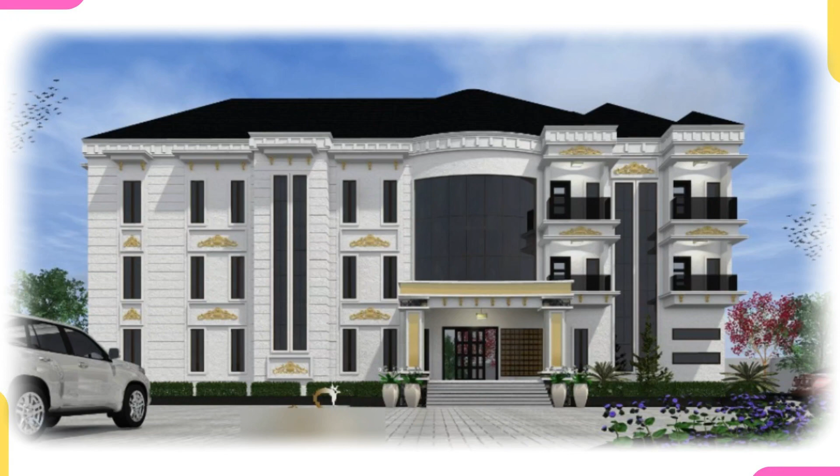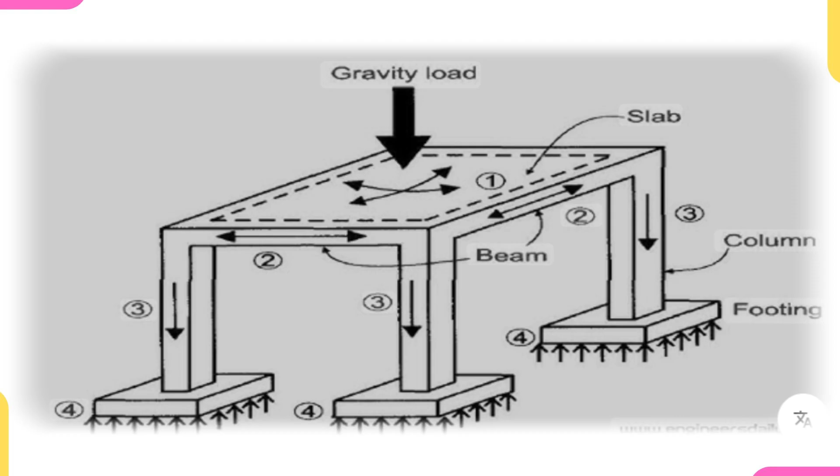Every building you see, no matter how beautiful or well designed, moves. Concrete expands when hot, contracts when cold, and shifts under load. And if we don't give that movement a place to go, the building will create it by force through cracks, separation, and structural failure. That's where expansion joints come in.

In this video, I'll be explaining everything you need to know about expansion joints, what they are, why they are used, and the engineering principle behind where we place them. We will talk about temperature changes, long span structures, shrinkage, differential settlement, and how expansion joints protect your building from

stress and cracking. By the end of this video, you will not just know what an expansion joint is, you will understand how to design it, how to position it, and how to keep your structure safe, durable, and stable for decades.

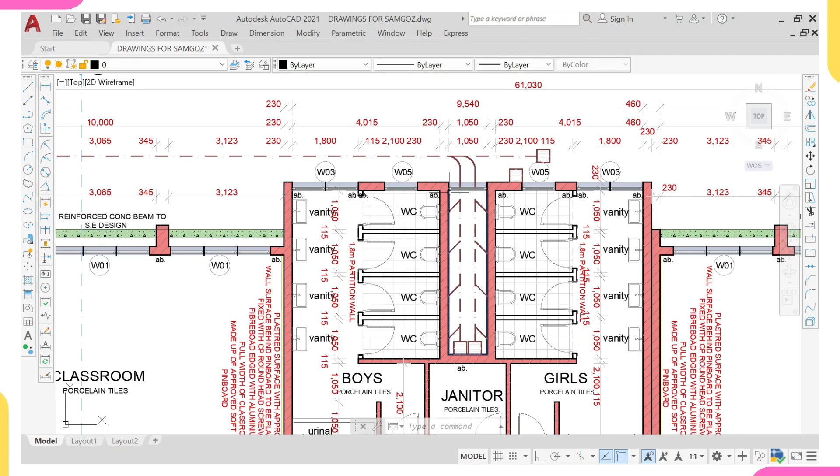This is a school building that we recently carried out for one of our clients. So if you can see, this building is more than 60 meters in length. This video is all about expansion joints. So first, I'll start with why we have expansion joints in our building. It's due to thermal expansion and thermal contraction. Let me explain so you get to understand better.

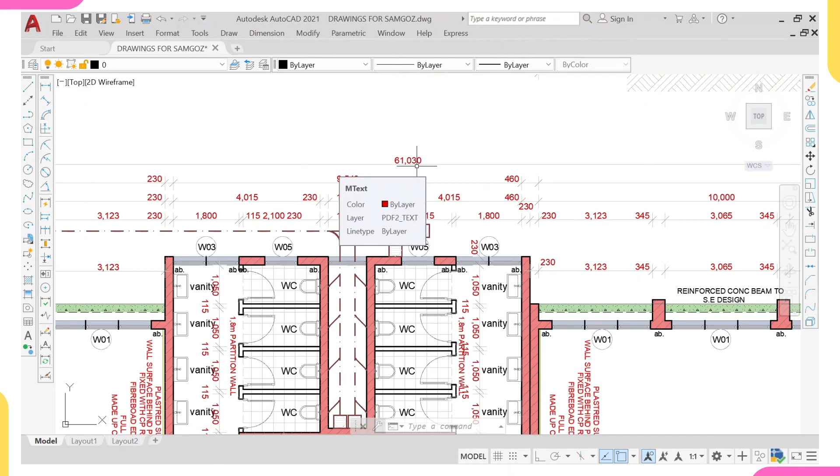Remember, concrete is subjected to expansion during high temperature. That means when it is under sun, concrete will tend to expand, and it is also subjected to contraction during low temperature. That's during cold weather, concrete will tend to contract. That's expansion and contraction, and this is known as thermal expansion and thermal contraction.

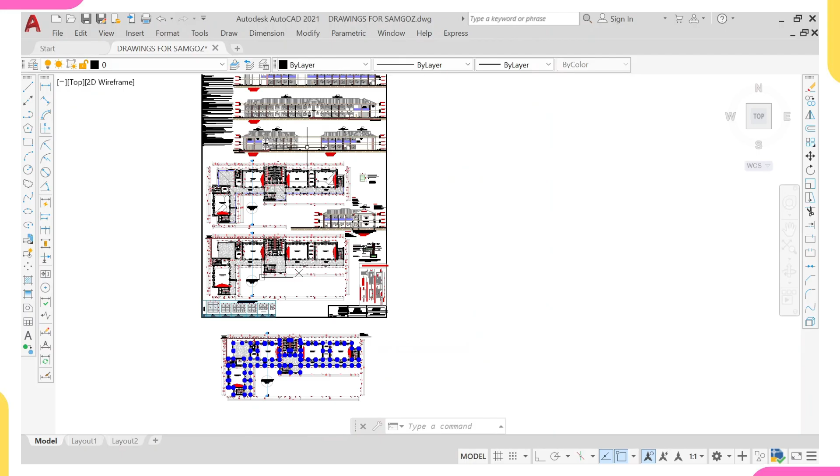So we include expansion joints so that our structural members can easily expand and contract without causing cracks. So for that reason, once our building is more than 30 meters in length, we include expansion joints. And how do we include expansion joints? So if you see, this is the school building project. This is the elevation, and this is the floor plan, the first floor plan. Then this is where we did our column placement.

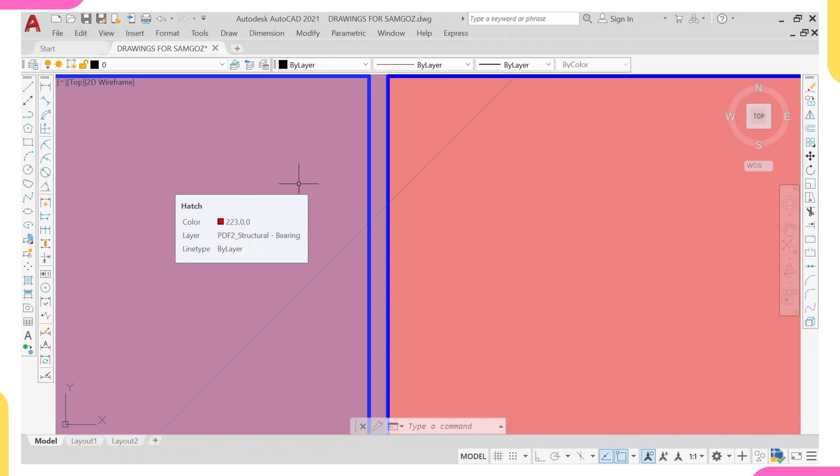So how do we introduce an expansion joint in our building? You introduce an expansion joint by placing two columns close to each other. Then the space in between those two columns is called your expansion joint. That means concrete will expand and contract, so that once it's expanding, it will not come in contact with this structural member. It gives it room to expand, and as a result, it will not cause cracks on the neighboring structural member.

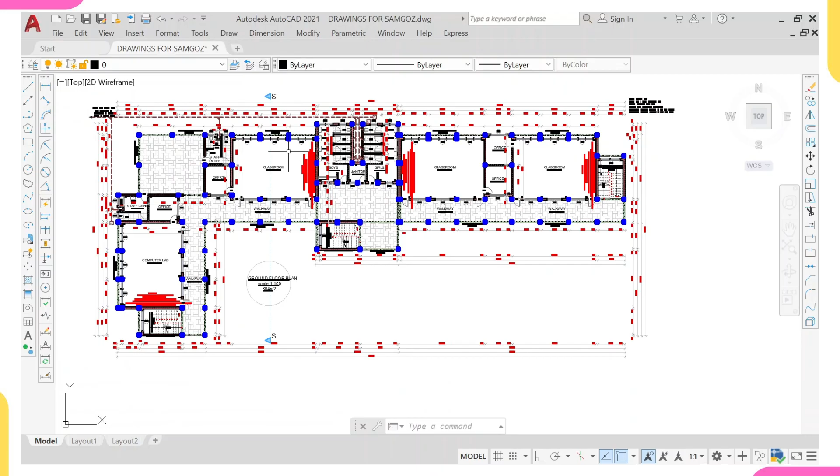So if you can see, this is the expansion joint. Look, we have this column and also this column. Then in between them is a space of 25 mm. So that space is our expansion joint. That means our concrete can expand and contract without causing cracks on the neighboring structural members. So that is the main reason for expansion joints.

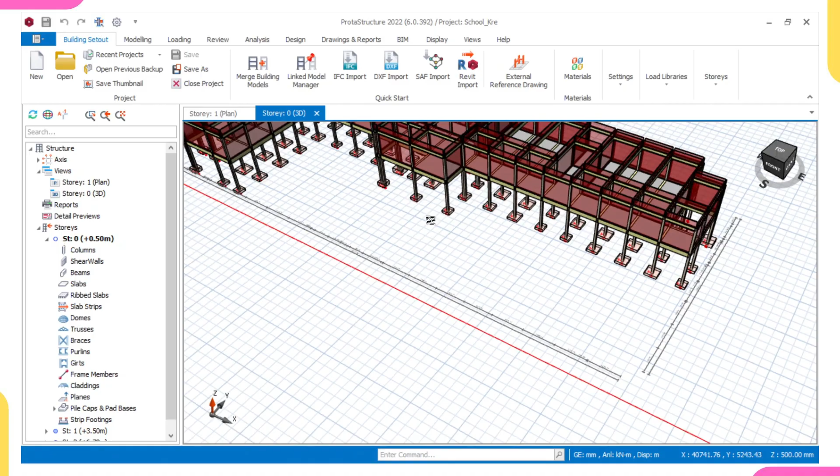Then I would like to explain something. Some people will also ask, should this expansion joint be seen at our foundation level? The answer is no. The expansion joint should not be seen at our foundation level. The reason is because at the foundation level, there is no temperature change. The temperature at the foundation level is moderate, because our substructure is covered by soil. So that soil causes our substructure to have a moderate temperature.

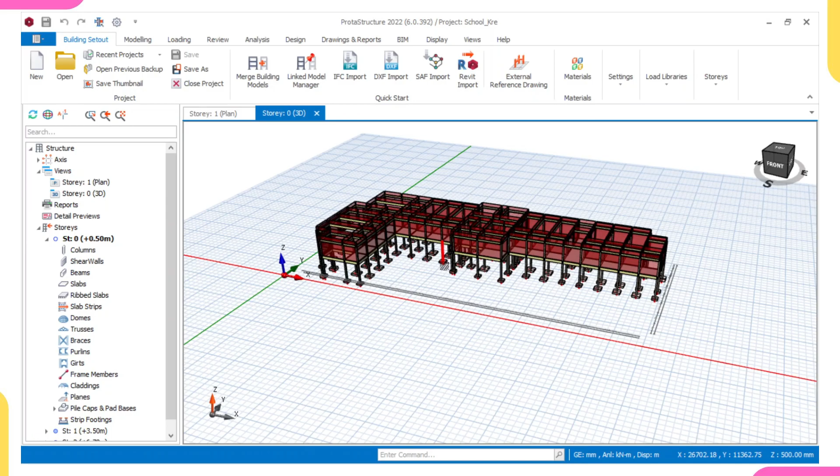That means at that substructure, there will be no heat and no cold, meaning that there will be no expansion and contraction, because the soil serves as an insulator. An insulator is any material that does not conduct heat or does not permit heat transfer. So since the soil acts as an insulator, preventing heat transfer in our substructure, there will be no expansion joint at the foundation level. That's why if you look at this pad footing, the expansion joint is not included.

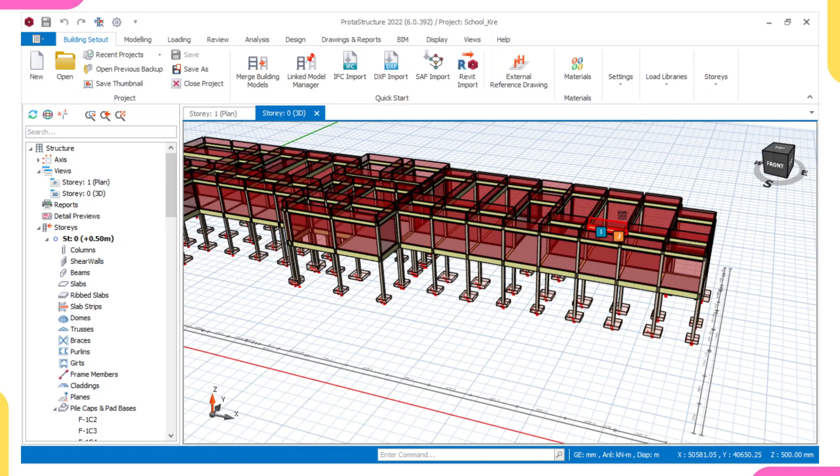But we do include settlement joint at the foundation level. Okay, what is the difference between expansion joint and settlement joint? For example, assuming that these are expansion joints, assuming that this side of the building is a three-story building, while this other side is just a one-story building, you know that the rate at which this side will settle will be different from the rate at which this side will settle.

For that reason we will be having what is called settlement joint. We will still call it expansion joint, but it's now serving two purposes. One, it will be serving as expansion joint, and also it will be serving as settlement joint. And two, the settlement joint will be seen at your foundation level.

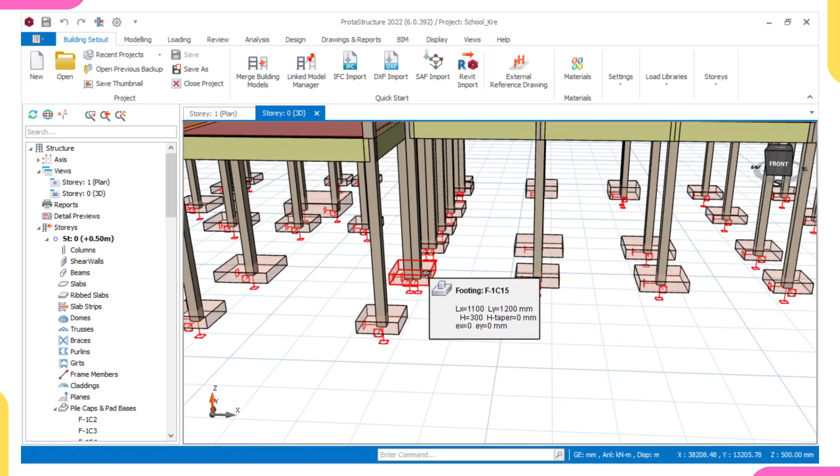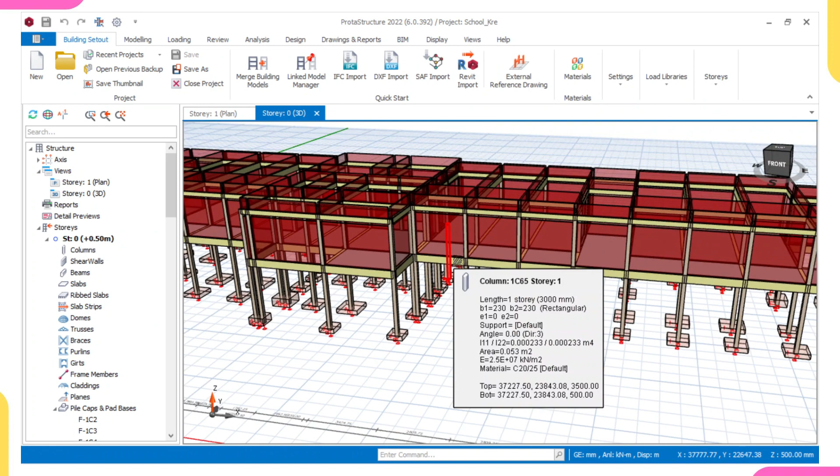So our settlement joint will start from this foundation level, and our settlement joint ranges from 150 millimeter to 200 millimeter. That is the range of our settlement joint. Why do we have settlement joint? I've explained it before. If here is a 3-story building and here is a 1-story building, the rate at which they settle will not be the same.

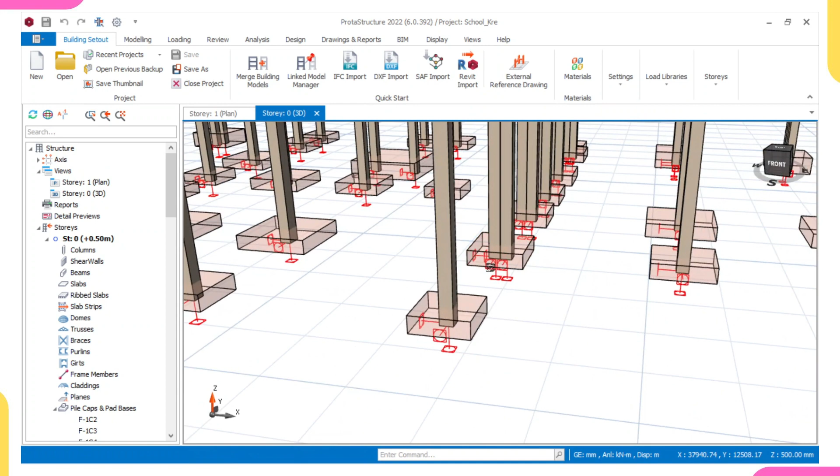That means this one that is a 3-story building will tend to settle faster than this one that is a 1-story building. And if the whole building is joined, there will be stress induced in the foundation level, which will result in cracks and structural failure. So to prevent those cracks and structural failure, we include what is called settlement joint. And our settlement joint starts from the foundation level up to the roof level. Then in case of seismic region,

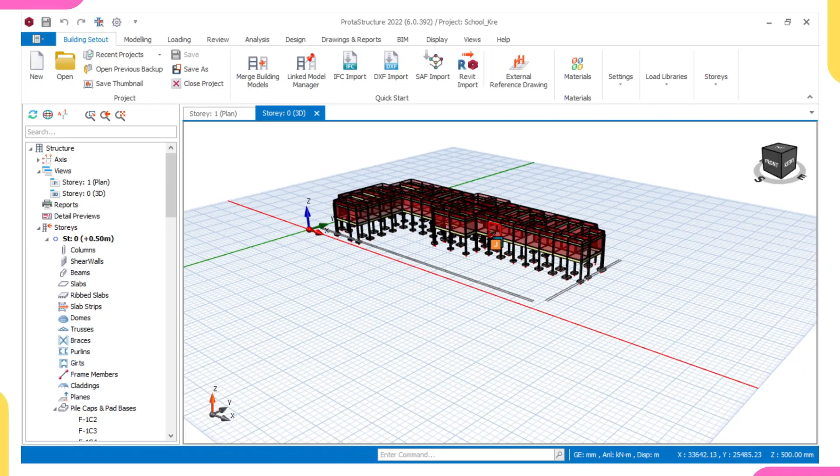We have seismic joint, but that one is far beyond the scope of this video. But for seismic joint, the spacing between our column members is 300 mm. So I hope you understand the reason why we have expansion joint in our building, and also the reasons why we include settlement joint and also seismic joint.